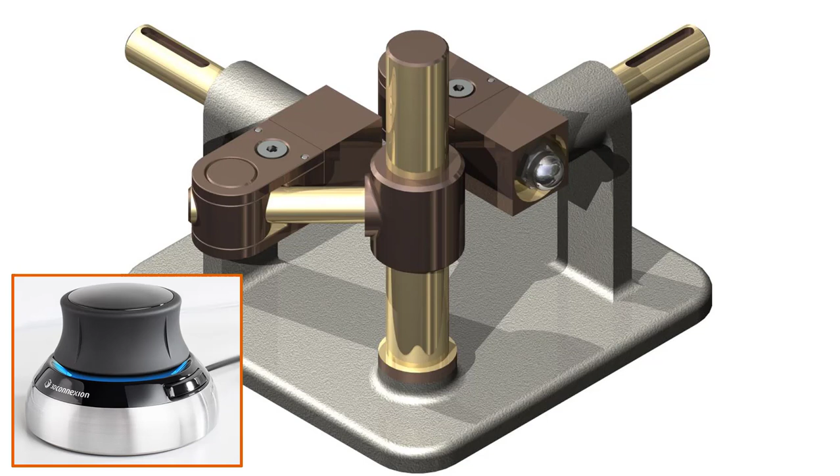Hi my friends, today we reopen this mechanism which was presented in my tutorial 178 because we want to apply the dynamic simulation for this mechanism. In fact, the question is, if you apply an input rotation here, is this output rotation equal in every moment with this one, or like at universal joint or gimbal coupling, which is not uniform. Let's see if this is uniform.

When you rotate here 30 degrees, to have here a rotation of 30 degrees, and this to happen in every moment.

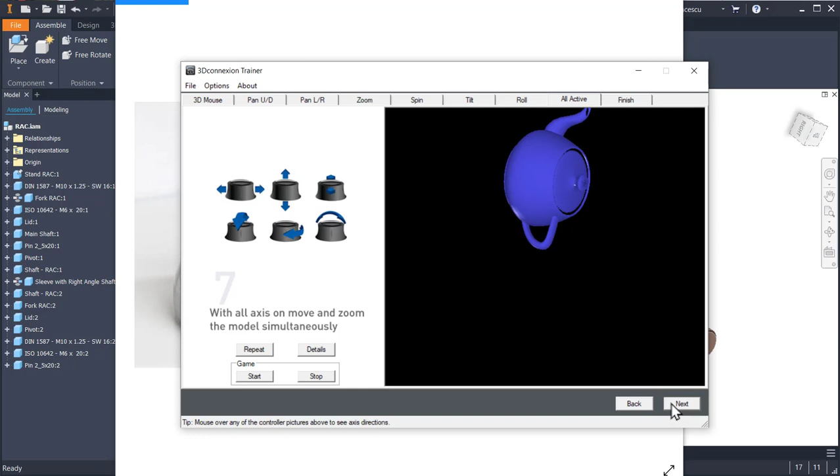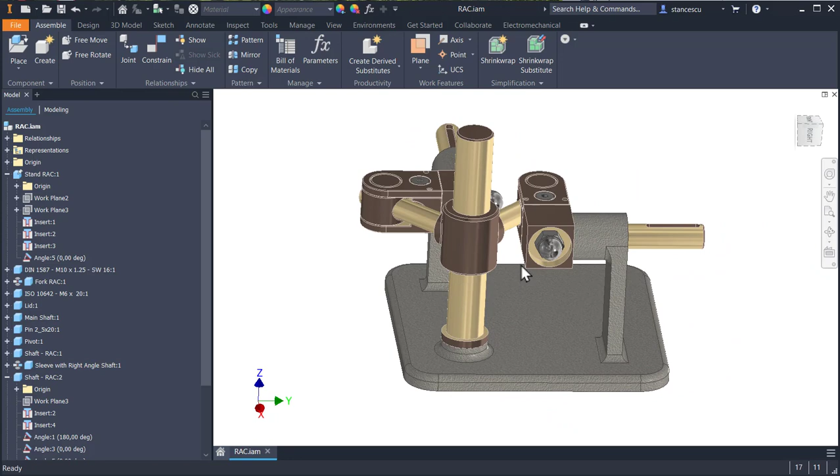Coming back to the subject, I recommend you to watch again the tutorial number 178 in order to remember and be very familiar with all the components and constraints imposed on this mechanism. F6, and before anything, let's repair a mistake which I presented when I made the assembly.

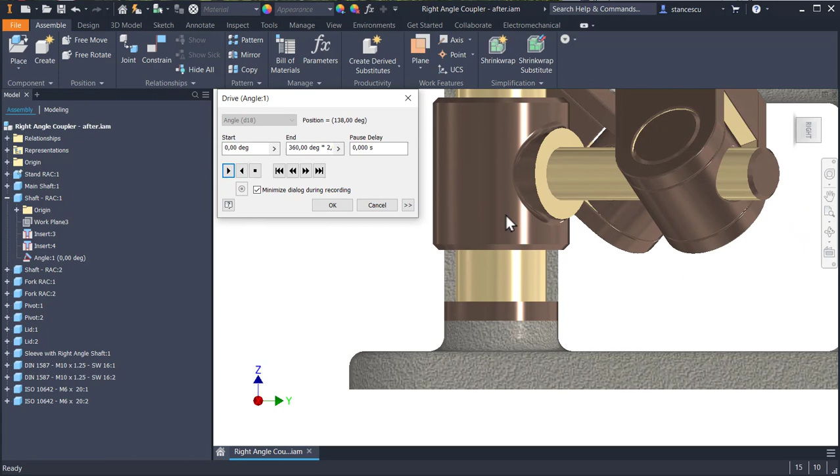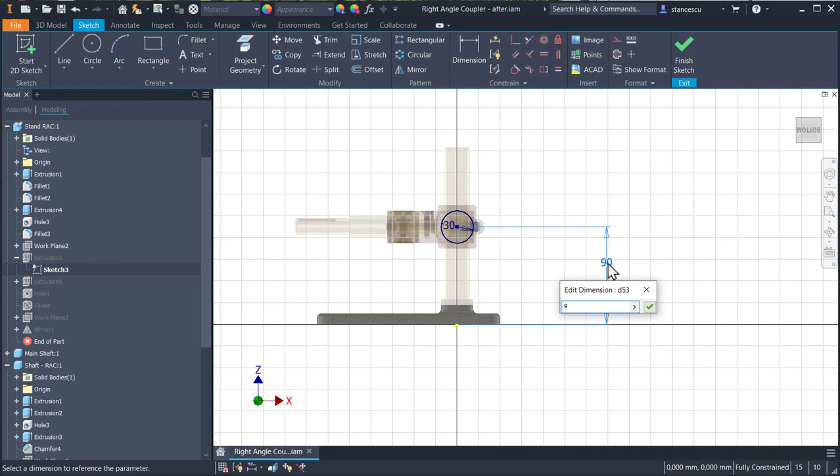If we start the drive, we can see that this sleeve comes over the bottom part of the main shaft. So this is a mistake. Let's repair it by editing the stand, the extrusion, which has a sketch, extrusion 3, sketch 3, double click, and change this with 95. Okay, return. Everything is updated, and now the problem is solved. Good.

I want you to know that when you are in the assembly environment, you can create extended names here by using options. Remember, we are in the assembly environment, so option, assembly, display component names after relationship names. Look here. Apply. Yes?

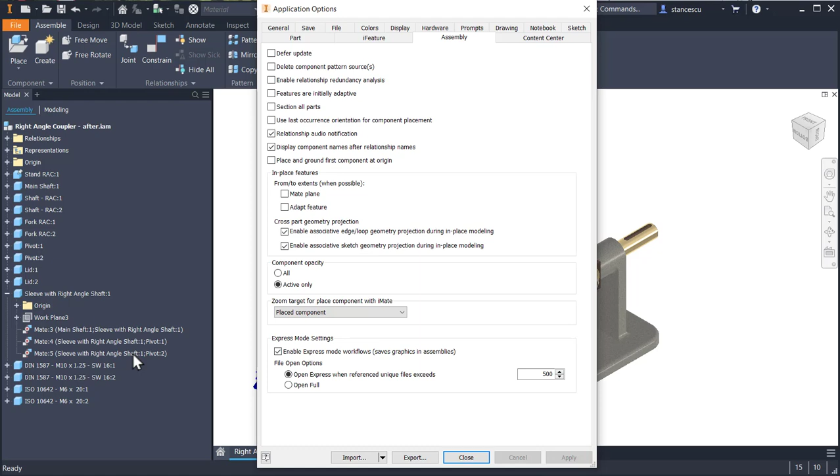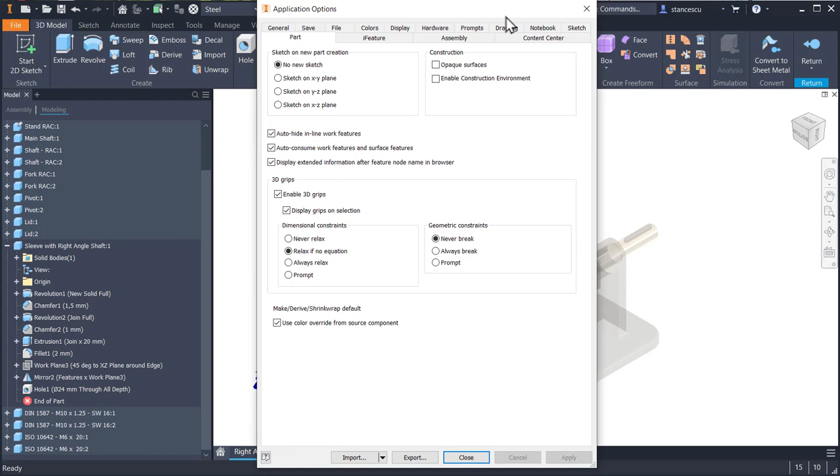And if you open and you are now in the part environment, you can apply the same option, but not on assembly, but to the part. Display extended information after feature name. Look here. Yes, we have more information about each feature. Good. This is good to know for you in the future.

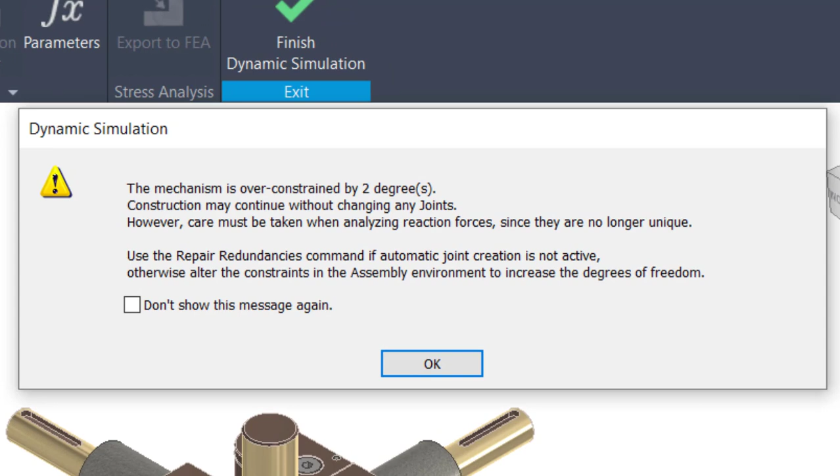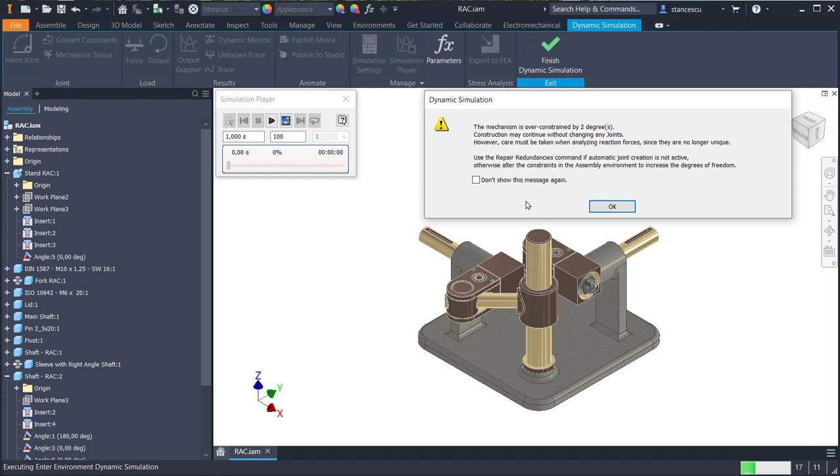Let's go to the problem. Apply dynamic simulation. We received the same message because there are two over-constrained degrees of freedom. Now we have experience from our previous tutorial, number 179, about this problem. However, this time we'll use another solution and we'll continue without changing joints, since we are not interested in force. You see, all these joints are created automatically by converting the constraints in the assembly. This happens because this option is enabled.

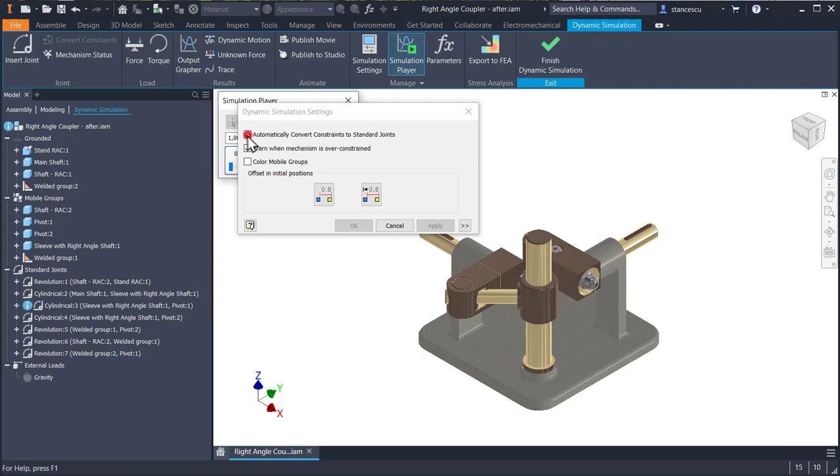I make something interesting and different. I disable this. And to the question, maintain standard joints automatically created from assembly constraints, I answer no. Now look here. Okay, all the joints have disappeared and all the components are grounded. The first is grounded because we selected grounding of the body of the stand, and the others because there are no joints to create movement between them.

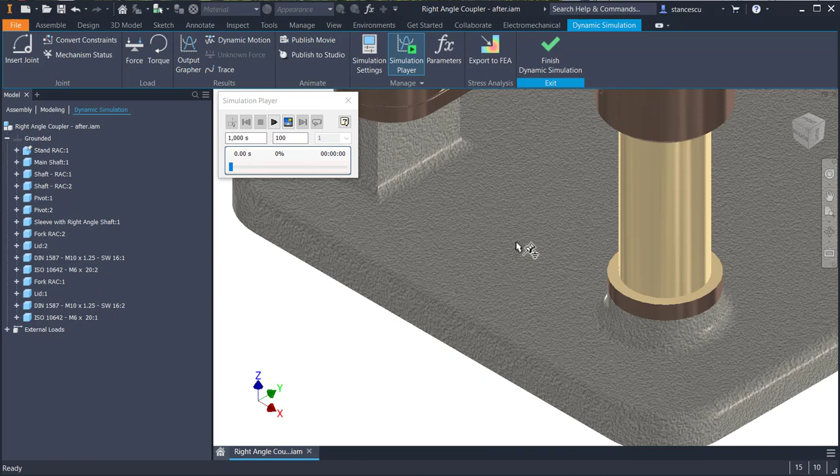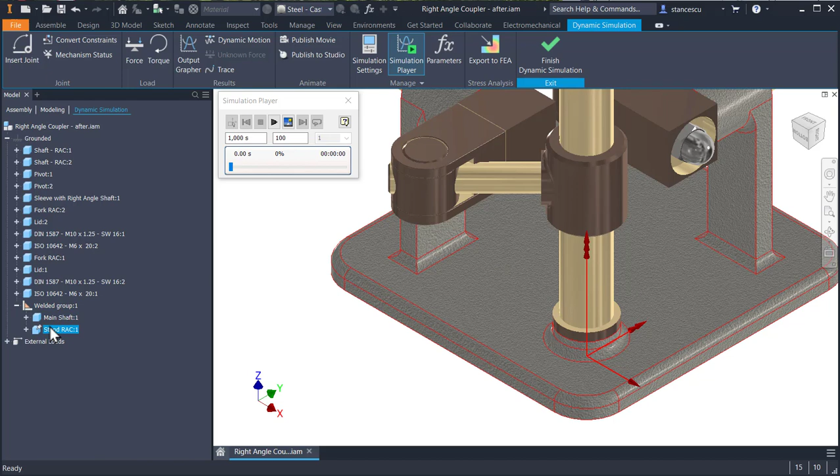Good. Next is to weld components which are a common part. For instance, this main shaft, look, it is selected here. I keep the key Control pressed and I select this. This is also selected. Right click and Weld Parts. Now we see here a welded group composed from these two parts. Nice. We have something different.

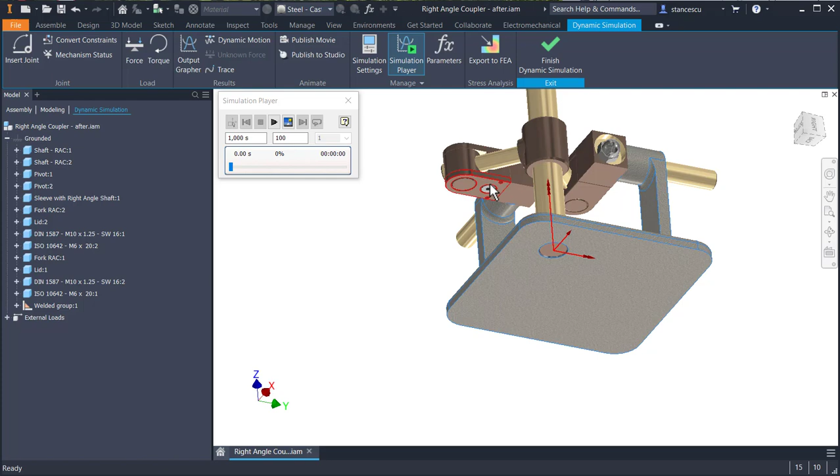Well, we can apply this to many other components. For instance, we can select the fork. This is the fork. Control pressed, lid, bolt, and we go back here, control, select the nut. 4 objects, 4 components are selected. Right click and apply Weld Parts. Good, another welded group was created.

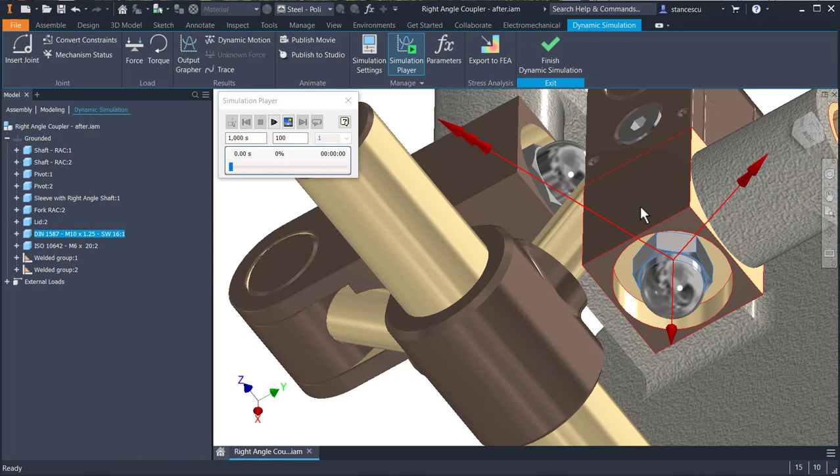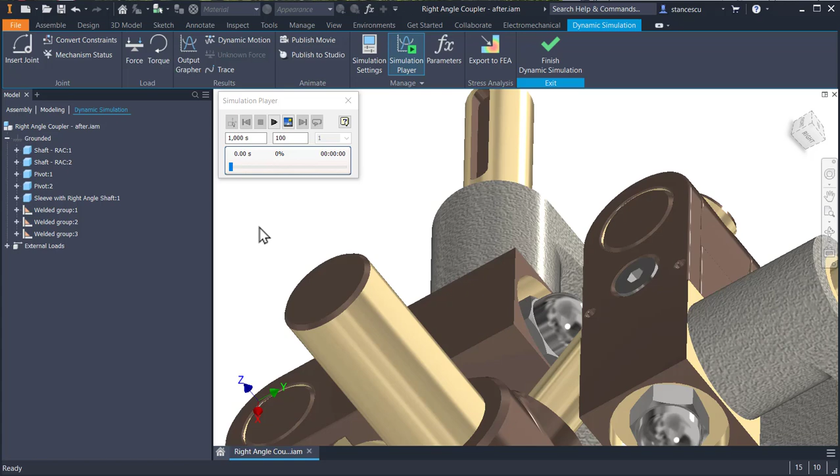The last one is this one. Control, I select the lid, I select the fork and also the nut. 1, 2, 3, 4. Now weld parts. We have 3 groups of components welded.

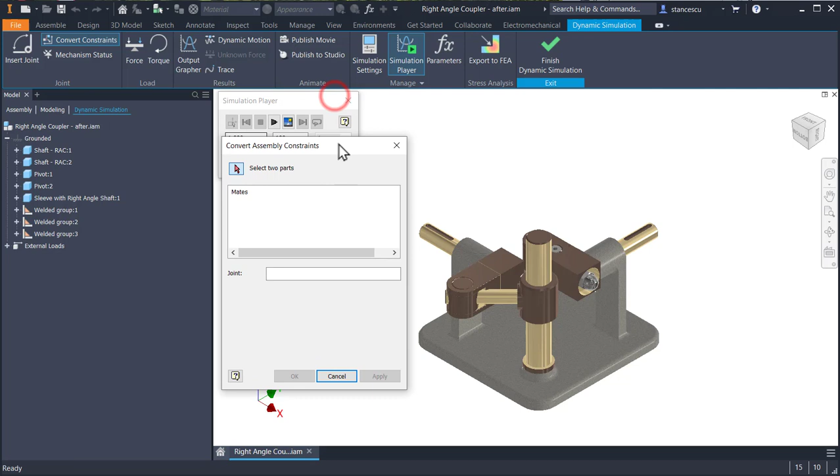Now we have to create joints. To create joints, we don't go back to the assembly and somehow convert them here. No. In this environment of dynamic simulation, we use this tool, Convert Constraints. We have a dialog box which asks us to select 2 parts. I select this and this, the shaft and the bearing, and we receive possible mates: insert, which is enabled, and angle, which is not enabled. We like this combination, so we apply because we want an insertion here.

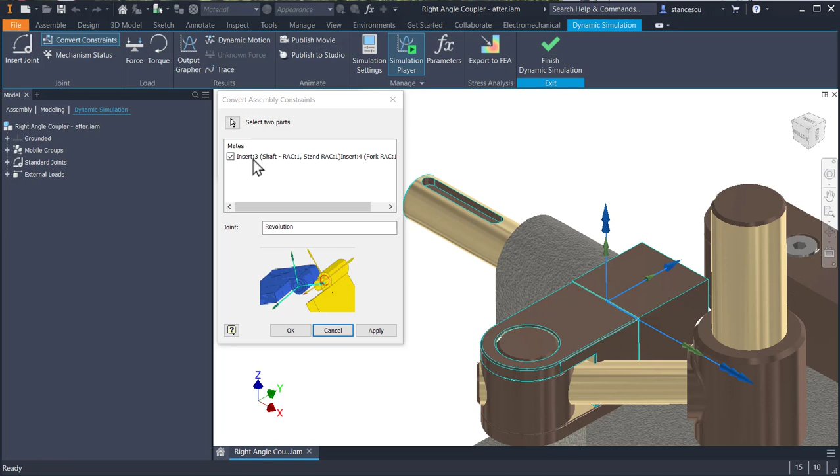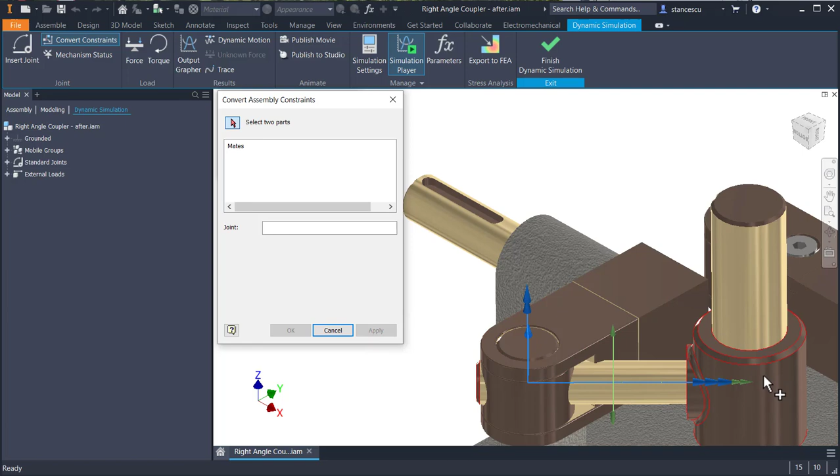Insert, apply. Next is between this shaft and the welded fork with the other components. We have here another insert, revolution joint, apply. Then the pivot and the fork, revolution, apply. Then the pivot with the 90 degrees shaft, apply. Then the 90 degrees, our sleeve with 90 degrees shaft, which is this, with the main shaft, apply. As long as we don't receive a message, these are okay, all of them.

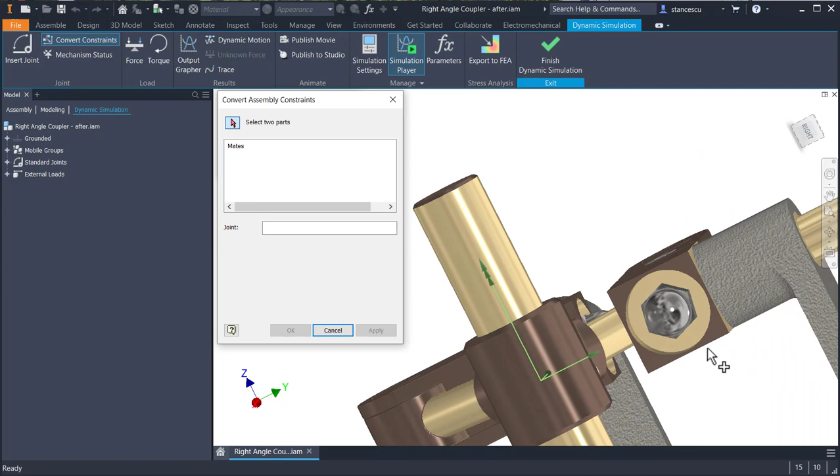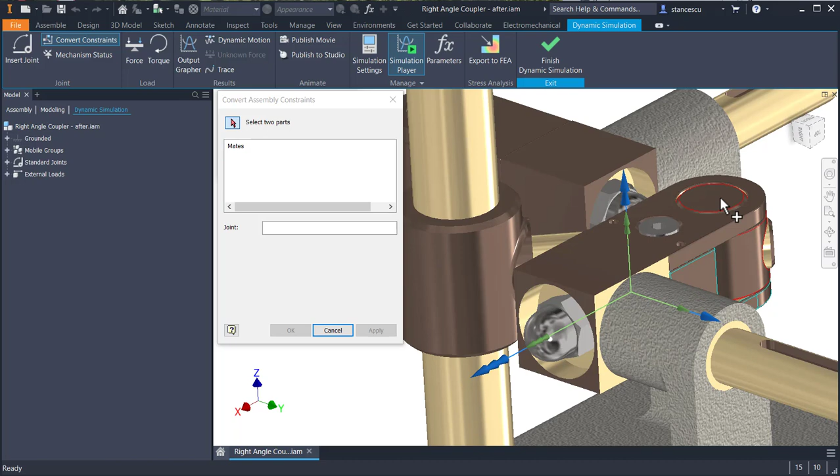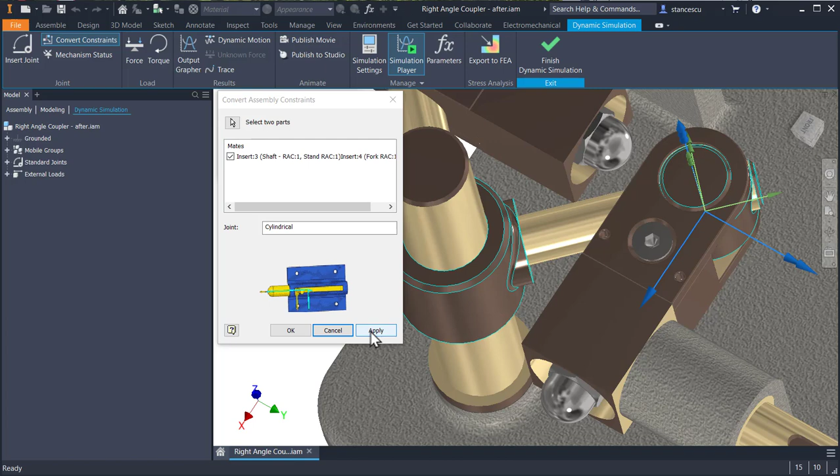Let's go to the other end of the assembly, which is this output end. This is input, this is output. We select the shaft and the bearing, apply. We select the body of the shaft and the fork, revolution, apply. We select the fork and the second pivot, apply. And now when we select the other shaft of this mid part with the corresponding pivot, apply, we receive an over constraint.

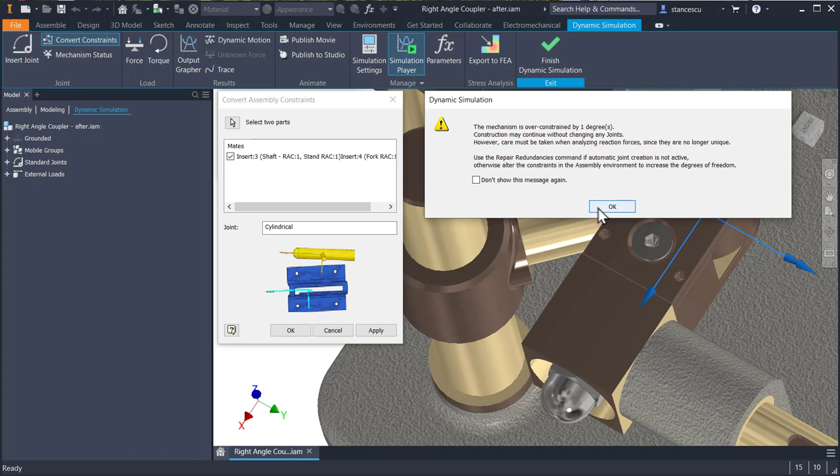But reading here, construction may continue without changing any joints. However, care must be taken when analyzing reaction forces, since they are no longer unique. We don't intend to use forces in the next moment. We'll use only the movement. You see, my intention is to see that when we rotate the input shaft, we have the same rotation all the time to the output shaft. We can do this with dynamic simulation.

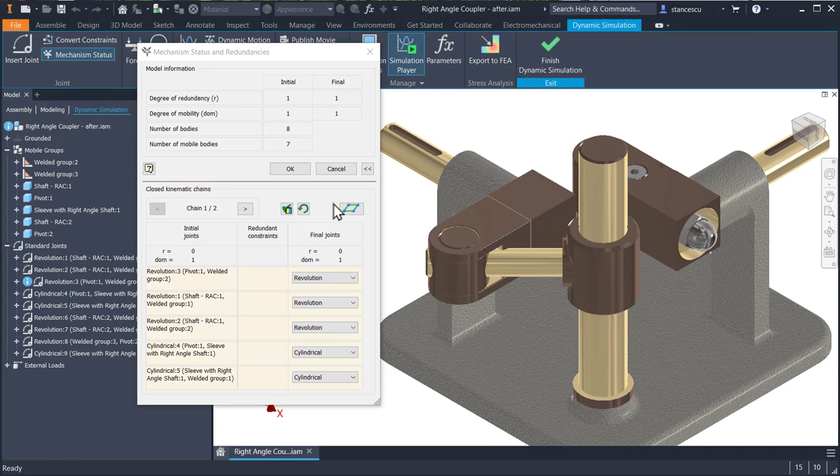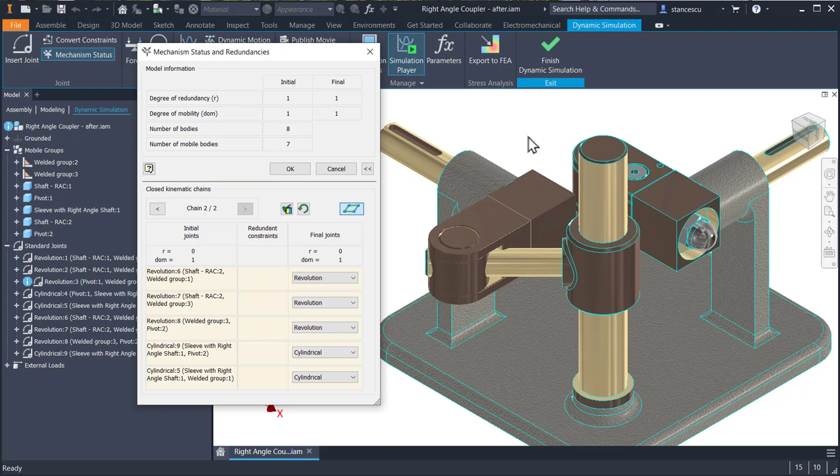Good. Let's take a look here. There are mobile groups and standard joints. One of them is with problems, but we don't care about this. Where is the problem? You see, we have now 2 chains. I want to see which are the chains. The first one is this left one with the stand, and the other one is the output with the stand. The mid shaft at 90 degrees is also selected. So the problem is here, but we don't have any information where is and what is. So we have to make investigations. Yes, we don't want to make investigations since we don't care about forces.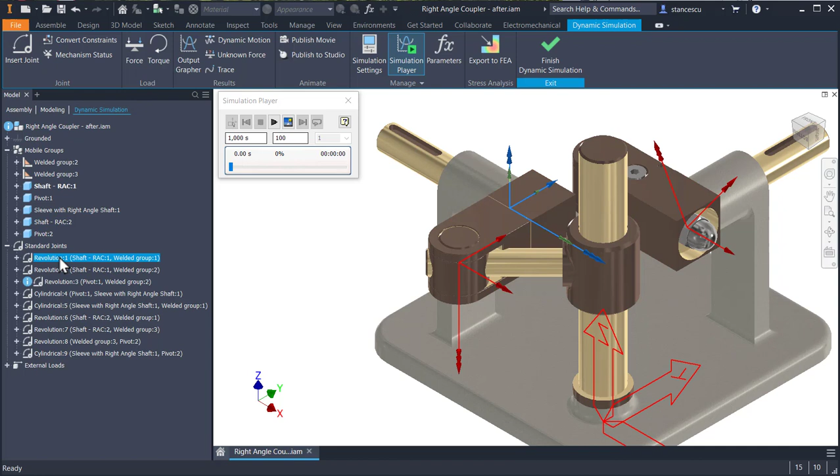Good. Now we look for the joint of the input shaft, which is the first one, to apply an imposed motion. You know how to do this, don't you? We study this joint by opening the properties option. The joint has only 1 degree of freedom. We select edit imposed motion. We select enable imposed motion and the graph. 1 second is the time, and I don't want 1 second, 0.25 seconds to be the start, the duration from 0 to 1/4 of a second.

And here I want to have 50 rotations per minute. You can place this manually, rotation per minute, because normal is degrees per second. And what is the value? You see, 300 degrees per second. I didn't make anything. It was changed for itself.

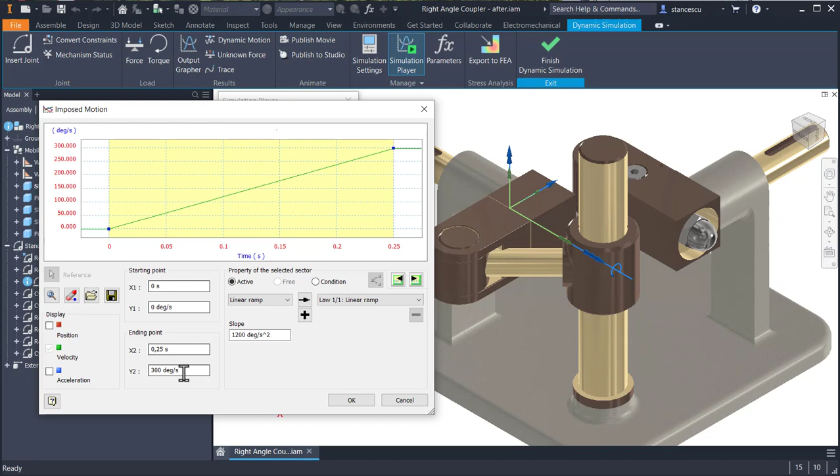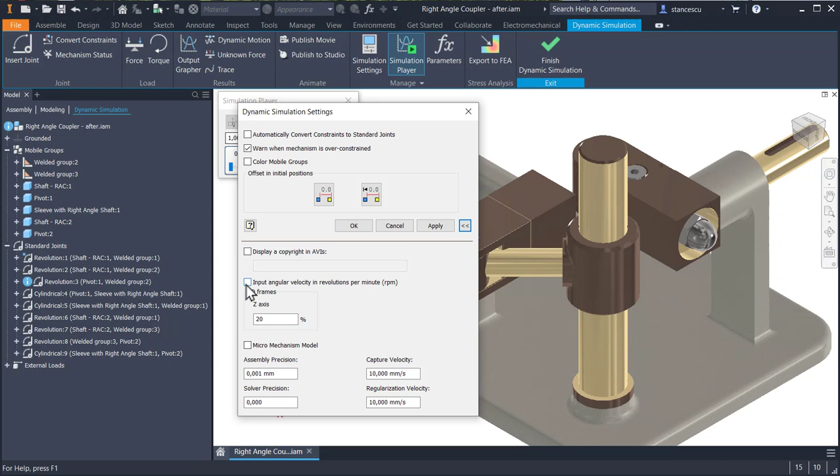If you want to work with RPM units, you have to go here and open the more extension, and here input angular velocity in revolutions per minute. If you enable this, you will have that units. Okay, we don't do this now. This is the only imposed motion we place.

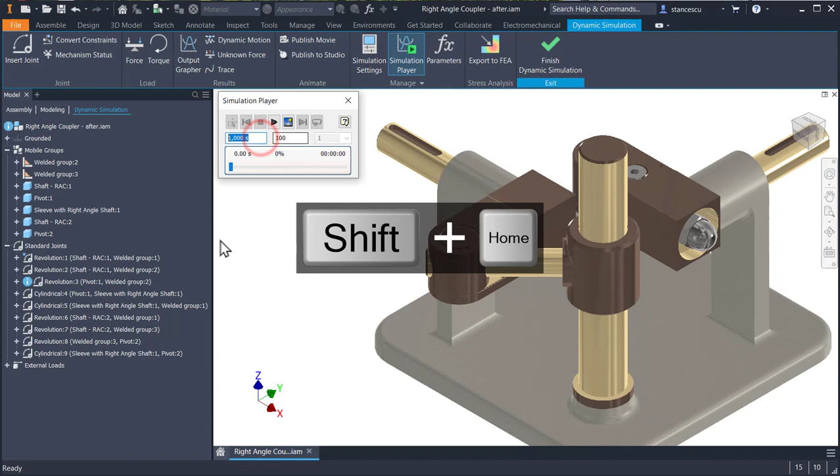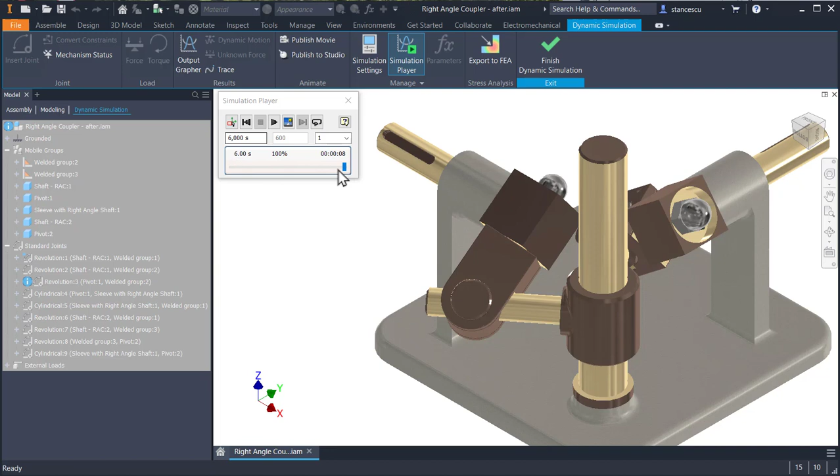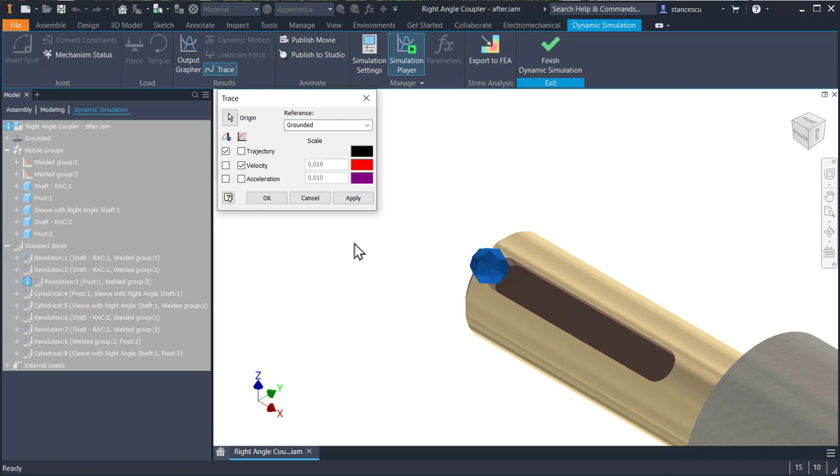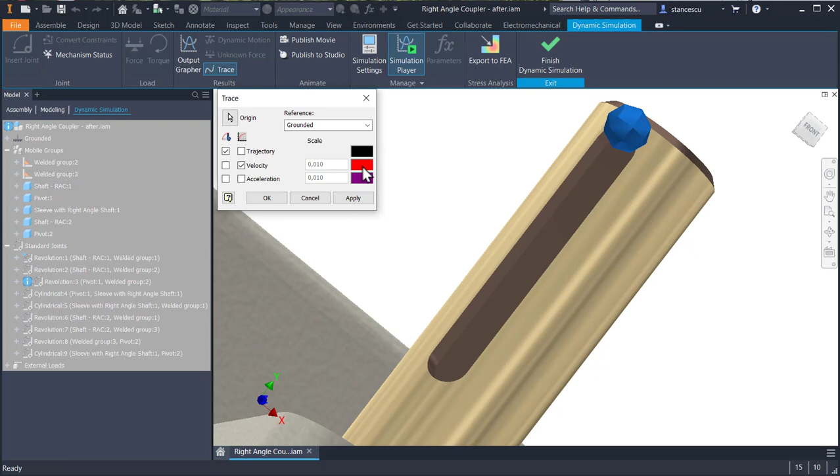To verify how it is, we select trace, we select the point on the cylindrical face, this point, and velocity. It will be red. The velocity will be red. Apply. We go to the other shaft, this one, and we place here velocity with another color. Apply. It's the same color. We can change the color. Okay. And now output grapher, which we know already.

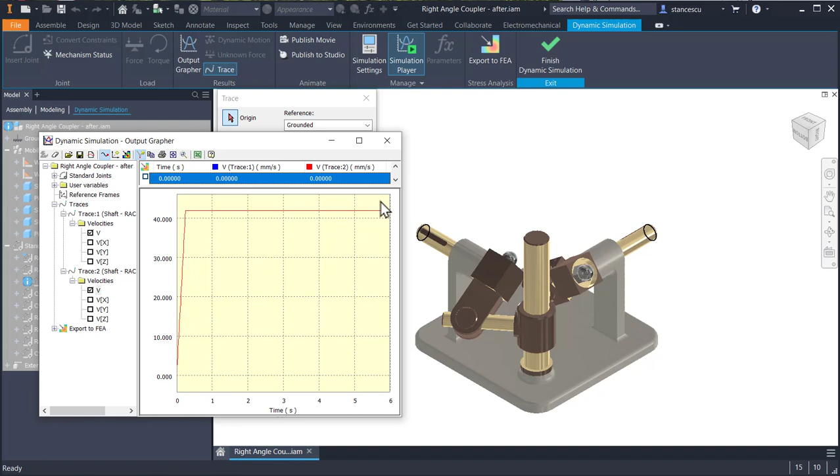Traces, velocities v, trace 1 and trace 2 v. One is blue and one is red. Which is which? The input is blue and the output is red. It is already drawn, and if we don't see here two curves or diagrams, we know that they are the same. Look, I disable this and we have only blue. This is the graph of input. We disable this. This is red. Yes, the two are identical, absolutely identical.

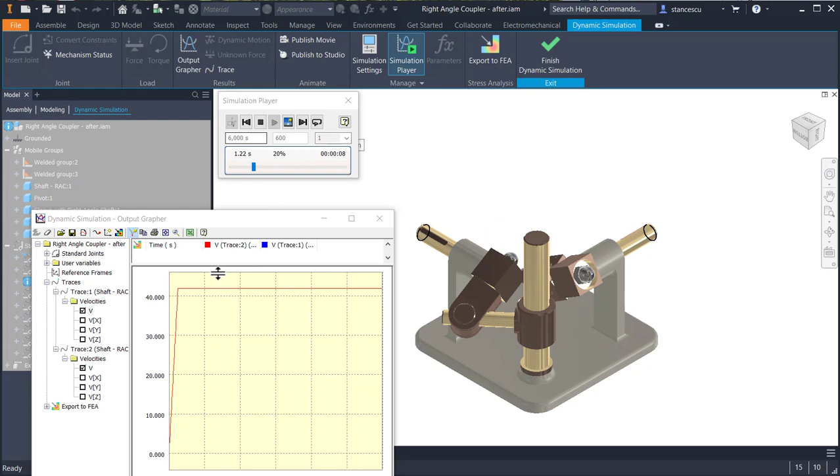Let's apply the movement again. Go back and movement. Everything is identical.